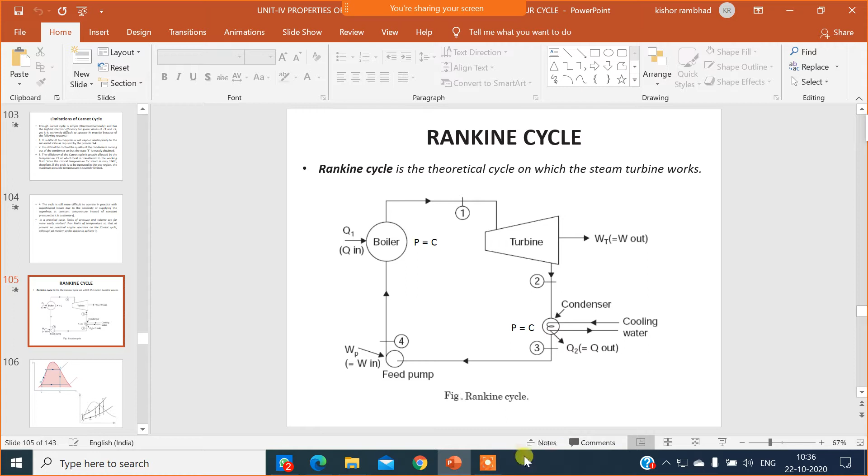In the last lecture, we have seen the Rankine cycle, but today we will also repeat the same thing that we have done in the last lecture. Rankine cycle is a basic cycle which is used for the thermal power plant, the steam powered power plant. Rankine cycle is a theoretical cycle on which the steam turbine works.

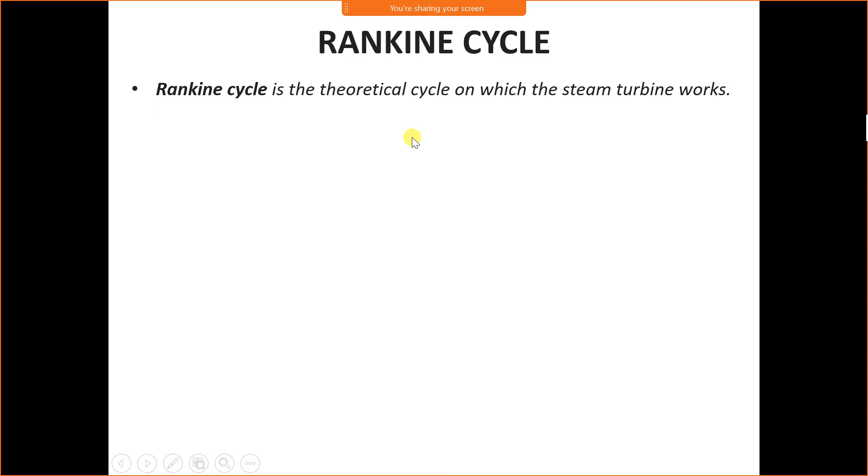Why is it called a theoretical cycle? Because a theoretical cycle cannot give us actual parameters or the actual efficiency. Therefore, we use a modified Rankine cycle in the actual power plant. Now today we'll study the theoretical Rankine cycle. The Rankine cycle is a basic cycle which is used in a thermal power plant or the steam turbine.

It consists of mainly four components. First is a boiler. In a boiler, water is converted into steam. Then that steam is supplied to the turbine, where the turbine rotates and the mechanical energy is converted into electrical energy and we get electricity. Then steam from the turbine is exhausted to the condenser, where cooling of the steam takes place with the help of cooling water and cooling tower. Then condensed steam, or we can say saturated liquid, enters the pump and the pump pushes the cold water again into the boiler.

The boiler is a type of heat exchanger, as well as the condenser is a type of heat exchanger. Boiler and condenser both are heat exchangers. A heat exchanger is a simple pipe which has been folded in a different fashion. It is a hollow pipe through which steam or any fluid we can say passes. Since there is no restriction inside the heat exchanger, pressure remains constant. Therefore, in a boiler and in a condenser, pressure remains constant.

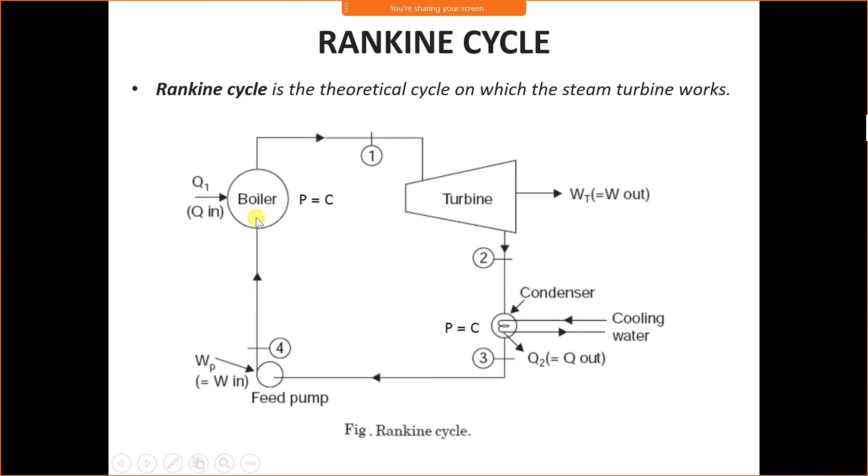At point 4, subcooled water enters the boiler. First subcooled water is converted into saturated water. During further heating, the saturated water is converted into saturated vapor. Only sensible heat is supplied from point 4 to A, so that temperature of water can range from subcooled temperature to saturated temperature. But from point A to point 1, only phase change takes place, and to change the phase, we need to supply latent heat. Therefore, heat supplied in the boiler starts at point 4 and ends at point 1. Total heat supplied in the boiler is 4 to 1, and that total heat is divided into two parts. First, 4 to A is sensible heat, and A to 1 is latent heat.

Then again from point 1 to 2 is isentropic expansion in turbine. Also in the pump, the process that takes place is isentropic pumping.

Let us look at the TS diagram. The TS diagram is like a Mollier chart. I will explain the Mollier chart. This is a saturation curve on the Mollier chart. On the TS diagram, you can see the saturation curve is slightly different.

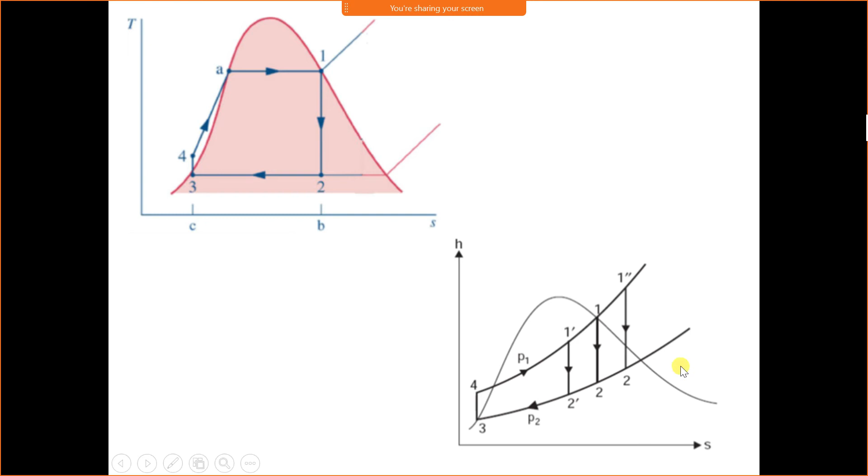Here you can see that the area inside this curve increases. It means work output also increases. The area inside 1 dash 2 dash 3 4 is less. The area inside 1 2 3 4 is slightly greater. The area inside 1 double dash 2 double dash 3 4 is greater than these two areas. Therefore the work done in this case will be greater than in the other cases.

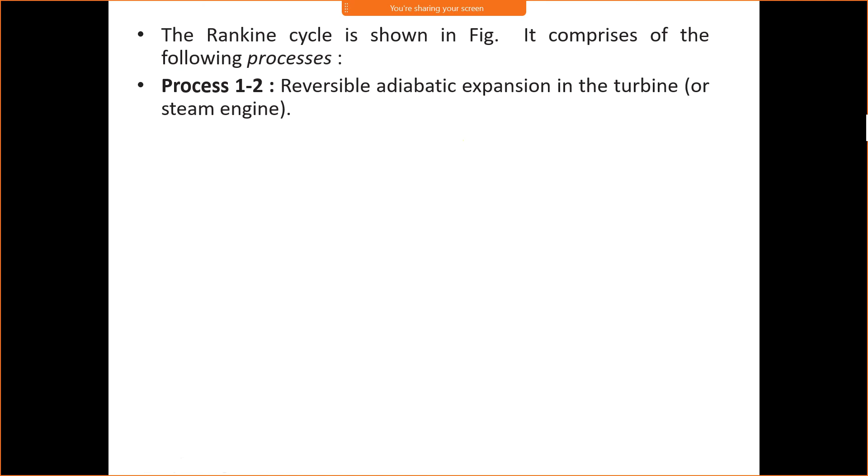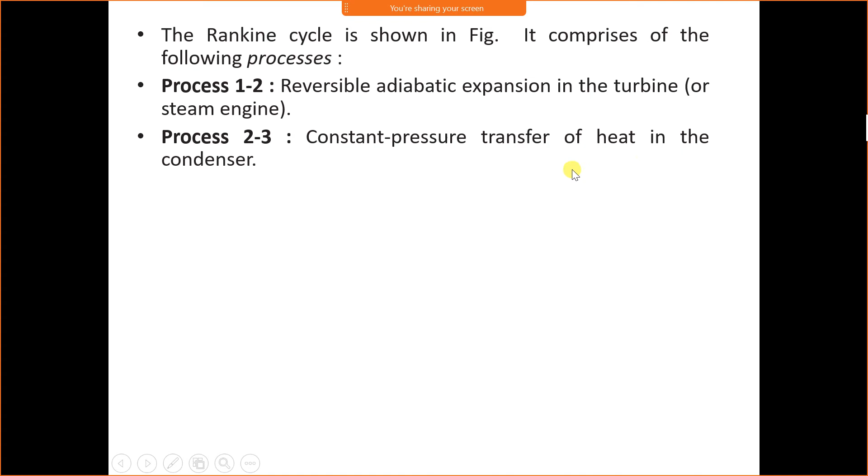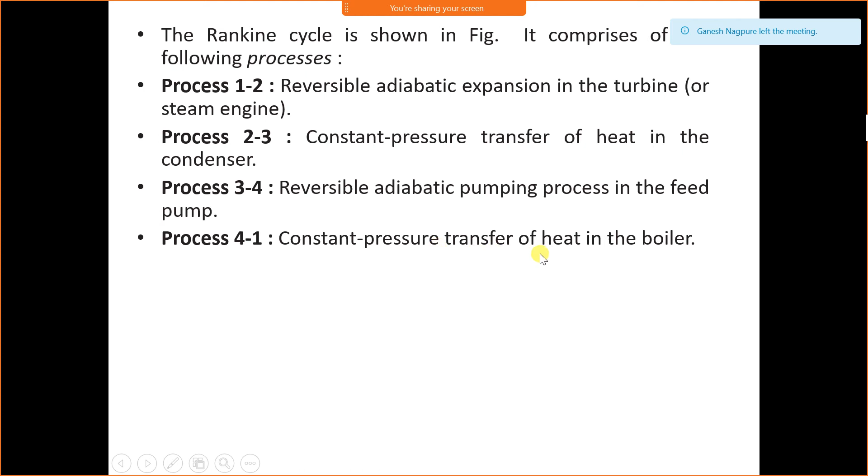Now the Rankine cycle comprises the following processes. Process 1 to 2 is reversible adiabatic, which is nothing but an isentropic process. Isentropic expansion takes place in the turbine. 2 to 3 is constant pressure heat transfer, or heat loss, or cooling process in the condenser. Then process 3 to 4 takes place in the pump. It is a reversible adiabatic, or isentropic, pumping process. Then process 4 to 1 is constant pressure heat transfer in the boiler, and heat is transferred to the boiler from the furnace.

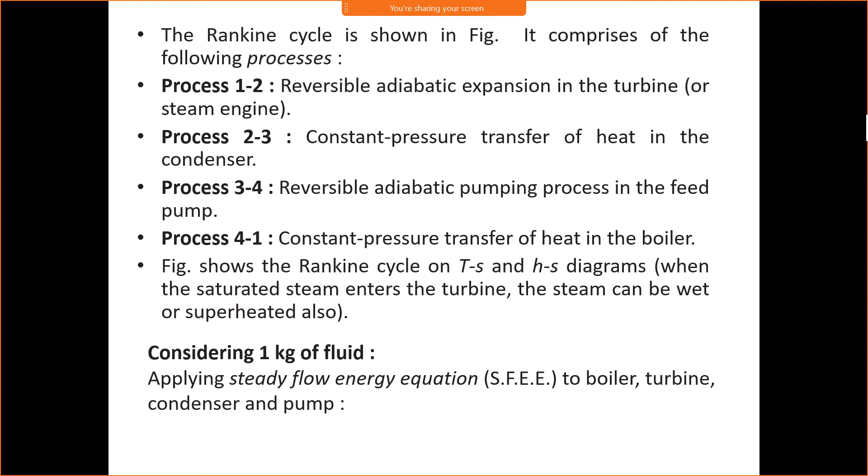The figure shows the Rankine cycle on TS and HS diagrams. When steam enters the turbine, it can be saturated, wet, or superheated. We have seen all three cases: entry to the turbine is wet, saturated vapor, or superheated vapor. Consider 1 kg of fluid. 1 kg of fluid means it may be steam and water. Suppose we are considering 1 kg of water, and the same amount is converted into steam, so the amount of water and steam will be the same.

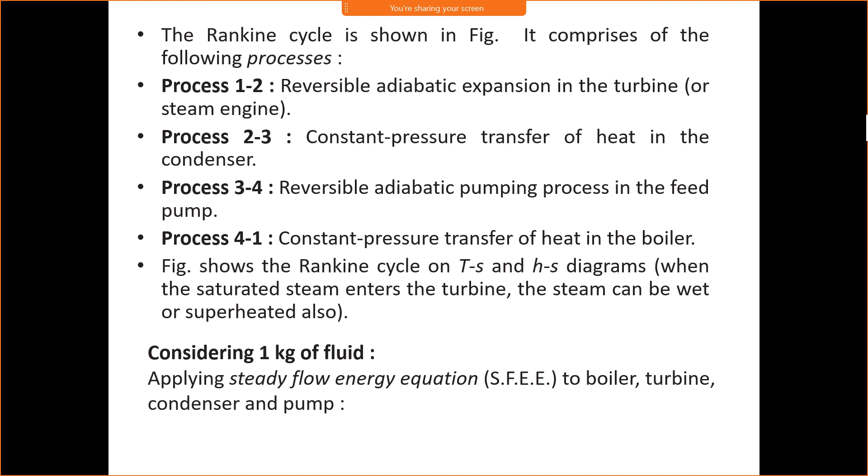Applying the steady flow energy equation to the turbine from point 1 to 2. Look at the figure. When steam enters the turbine at point 1, steam has some enthalpy. Using this enthalpy, the turbine gives output, that is WT, and it rejects some amount of heat. Therefore, enthalpy at point 1 is converted into work done plus enthalpy at point 2.

Okay, for the boiler, subcooled water enters the boiler at point 4. Here the condition of water is subcooled. Therefore, for subcooled and saturated water we write HF. Since it is point 4, we are writing HF4.

And heat is added to the boiler. It's converted into steam at point 1. Therefore, enthalpy at point 1 is the sum of enthalpy at point 4 plus heat supplied. Here you can see water is supplied with an enthalpy HF4, then heat is added to the boiler and it converts into steam with an enthalpy H1. Therefore, Q1 is equal to H1 minus HF4. Heat supplied to the boiler is equal to enthalpy at outlet minus enthalpy at inlet.

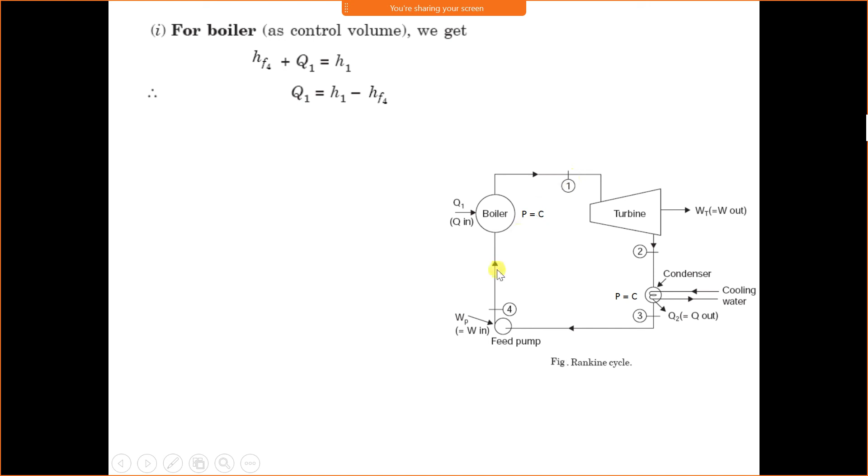Then the turbine is working between point 1 and point 2. Therefore, enthalpy at point 1 is equal to work done plus enthalpy rejected. Therefore, H1 is equal to WT plus H2, and WT is the turbine work. Therefore, to find turbine work, WT is equal to H1 minus H2. Work output from the turbine is the difference of enthalpy across the turbine, that is H1 and H2. We have to take the difference H1 minus H2. Since H1 is greater, we will write H1 first, then H2.

For the condenser, wet steam enters at point 2. Therefore, the enthalpy at point 2 is H2, and heat is removed, and we get saturated water at point 3. Therefore, H2 is equal to Q2 plus HF3. Q2 is the heat removed in the condenser. Therefore, Q2 is equal to H2 minus HF3. Now, Q2, heat rejected in the condenser, is equal to the enthalpy difference across the condenser, that is H2 minus H3.

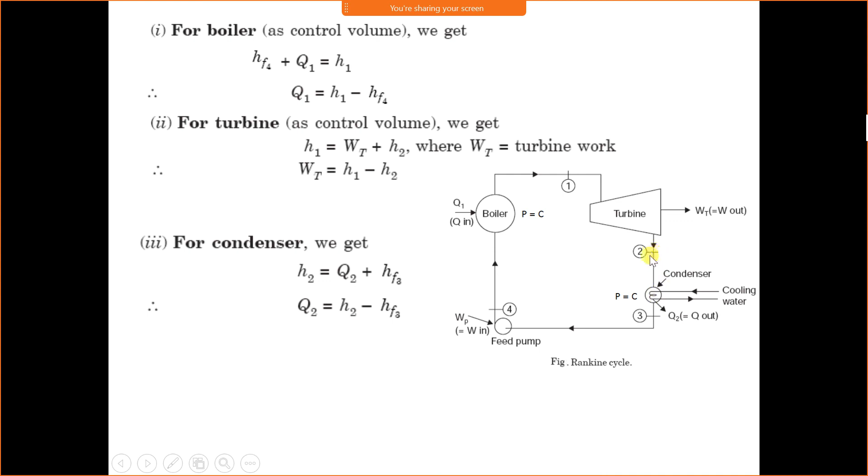Then, for the feed pump, saturated water enters the pump at point 3. The pumping process takes place and subcooled water leaves the pump. Therefore, work done on the pump: we are supplying saturated water at point 3, that is HF3, and we are supplying work to the pump, and it is giving us subcooled water at point 4, that is HF4. Therefore, HF3 plus WP is equal to HF4. WP is equal to HF4 minus HF3.

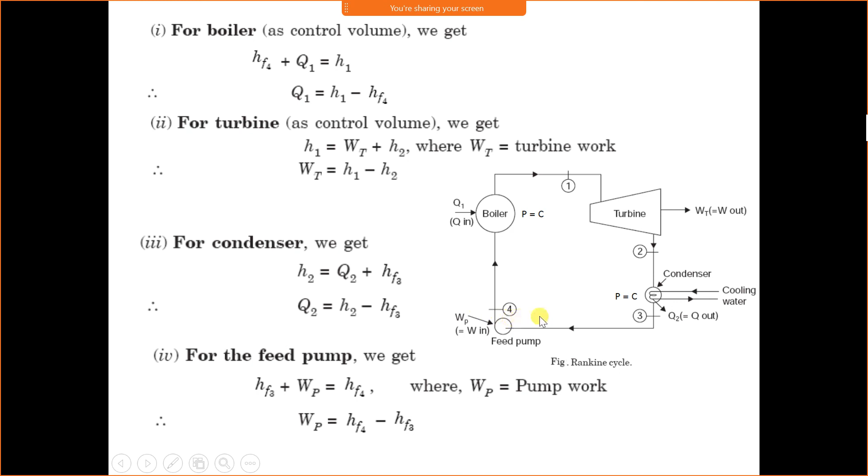Only we have to take heat supplied or heat rejected across the boiler and condenser. Heat supplied across the boiler is H1 minus H4. Work done across the turbine is H1 minus H2. Heat rejected across the condenser is H2 minus H3, and work supplied to the pump is the enthalpy change across the pump, that is H4 minus H3. Okay, since here it is a liquid, H4 is HF4, and here also it is a liquid, it is HF3.

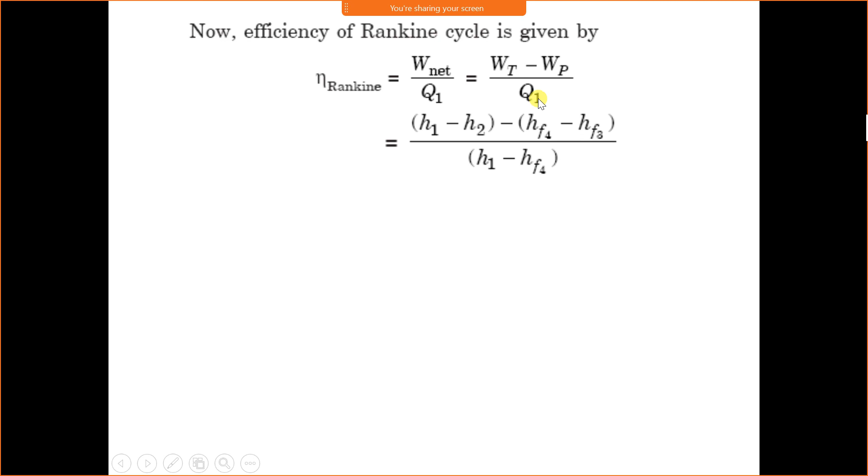Now, the efficiency of the Rankine cycle is output upon input, and output is the net work output, and input is the heat supplied from the furnace to the boiler. Now, what is net output? We are getting work done from the turbine, and we are using some part of that work to run the pump. Therefore, net work is WT minus WP, and Q1 is heat supplied. Now, WT, work done in the turbine, is H1 minus H2, and work supplied to the pump is HF4 minus HF3, and heat supplied to the boiler is H1 minus HF4.

Now, if we find out the work required to drive the pump, it is a flow device, therefore we have to apply the formula of work done of a flow process, that is V into dP. The feed pump handles liquid water which is incompressible, meaning volume remains constant, which means with the increase in pressure its density or specific volume undergoes little change. Using the general property relation for a reversible adiabatic process, we get heat supplied is equal to dH minus V into dP. Now, the process that takes place in the pump is isentropic, therefore the heat term is equal to 0. Therefore, we can write dH is equal to V dP.

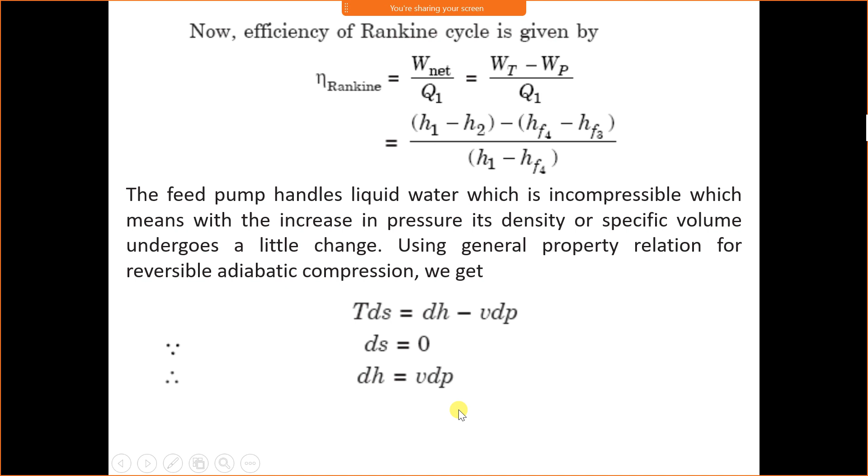Now, dH is equal to V into dP. Now, dP is a change in pressure, P1 minus P2, but in this case we can write P4 minus P3, and change in enthalpy HF4 minus HF3. Why are we writing P1 minus P2? Because the pressure change takes place above the pump and below the pump. In the pump, we can say at the entry to the pump pressure is less, and at exit from the pump pressure is high. Therefore, P1 is the pressure at the exit of the pump and P2 is the pressure at entry to the pump.

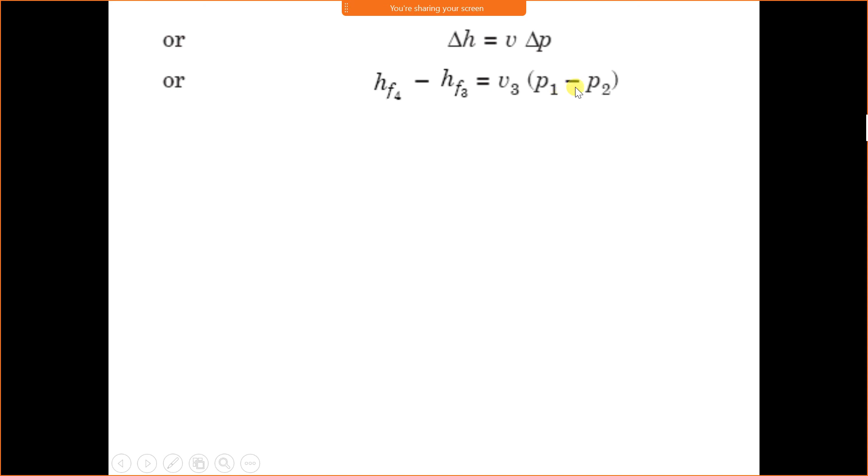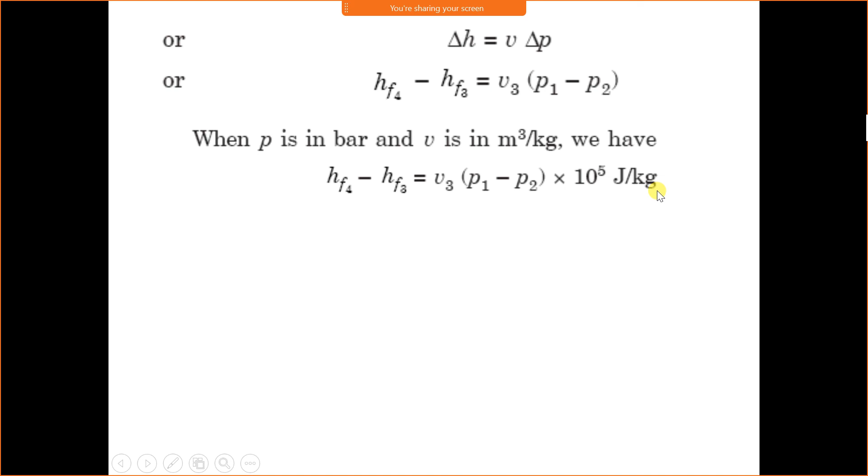When P is in bar and V is in meter cube per kg, meaning V is the specific volume, we have HF4 minus HF3 equal to V3 into P1 minus P2 into 10 to the power 5 joule per kg. The feed pump term HF4 minus HF3 is a small quantity; if we take the difference of HF4 and HF3, it is very small in comparison with the turbine work. WP is usually neglected, especially when the boiler pressure is low. When the boiler pressure is low, we get HF4 minus HF3 very small as compared to the enthalpy change in the turbine. Since this value is very small, the work supplied to the pump is very small as compared to work generated in the turbine. Therefore, WP is most of the time neglected.

Therefore, Rankine efficiency is the ratio of WT upon heat supplied. Okay, WT is H1 minus H2 and heat supplied is H1 minus HF4.